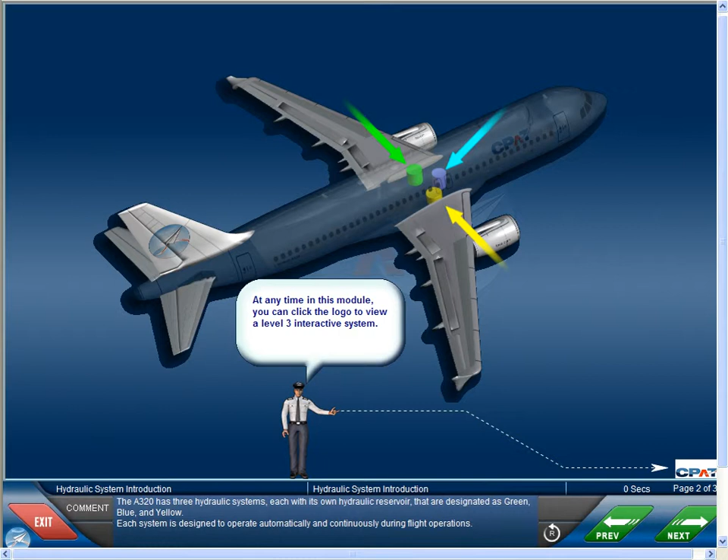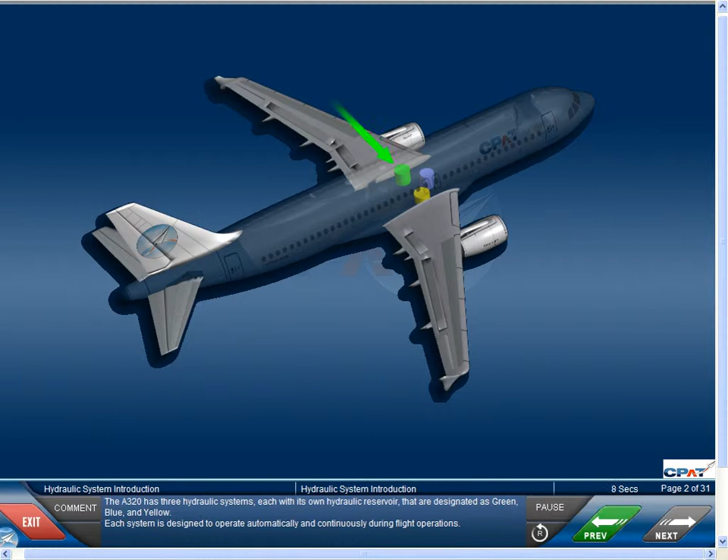The A320 has 3 hydraulic systems, each with its own hydraulic reservoir, designated as green, blue, and yellow. Each system is designed to operate automatically and continuously during flight operations.

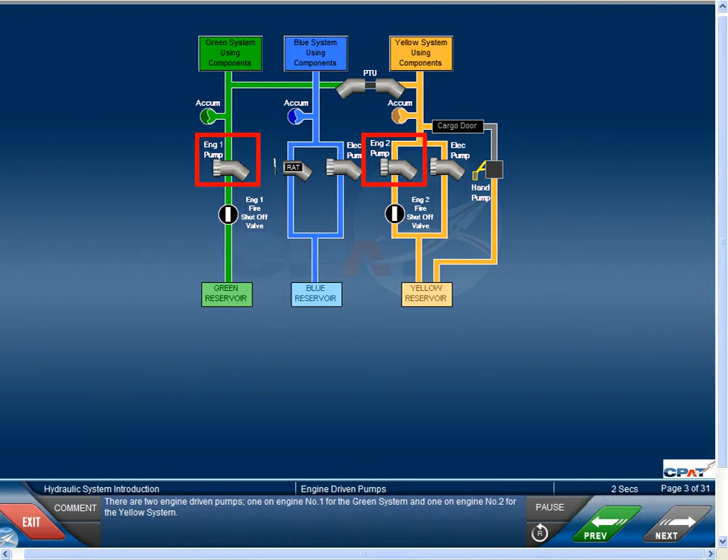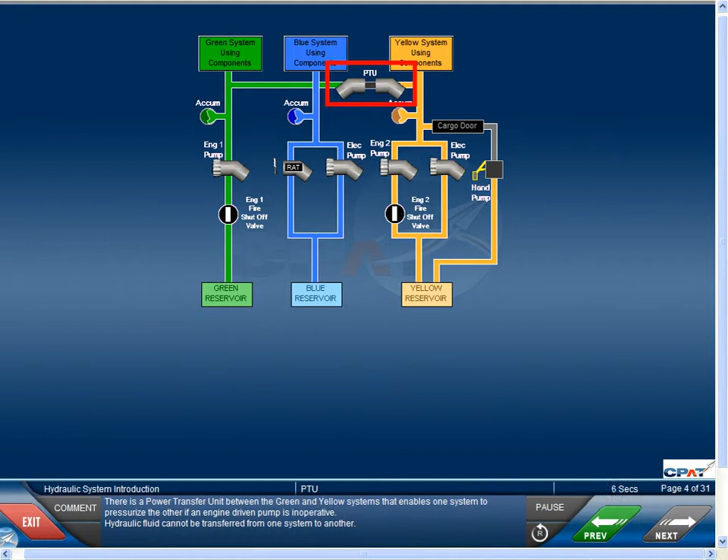There are 2 engine-driven pumps, one on engine number 1 for the green system and one on engine number 2 for the yellow system. There is a power transfer unit between the green and yellow systems that enables one system to pressurize the other if an engine-driven pump is inoperative. Hydraulic fluid cannot be transferred from one system to another.

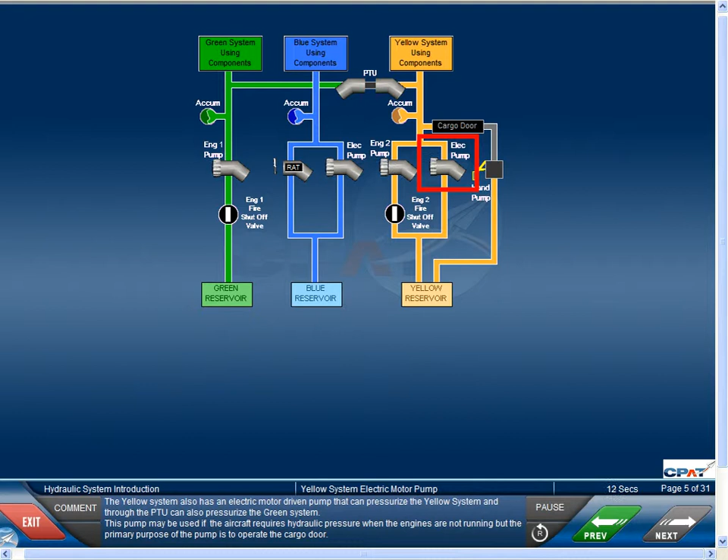The yellow system also has an electric motor-driven pump that can pressurize the yellow system and, through the PTU, can also pressurize the green system. This pump may be used if the aircraft requires hydraulic pressure when the engines are not running, but the primary purpose of the pump is to operate the cargo door.

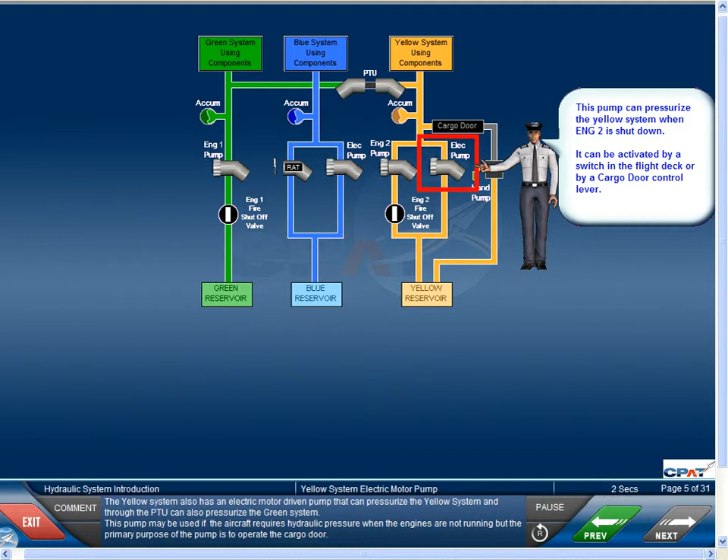The yellow system is also equipped with a hand pump that allows manual pressurization of that system to operate the cargo doors when the aircraft is not electrically powered.

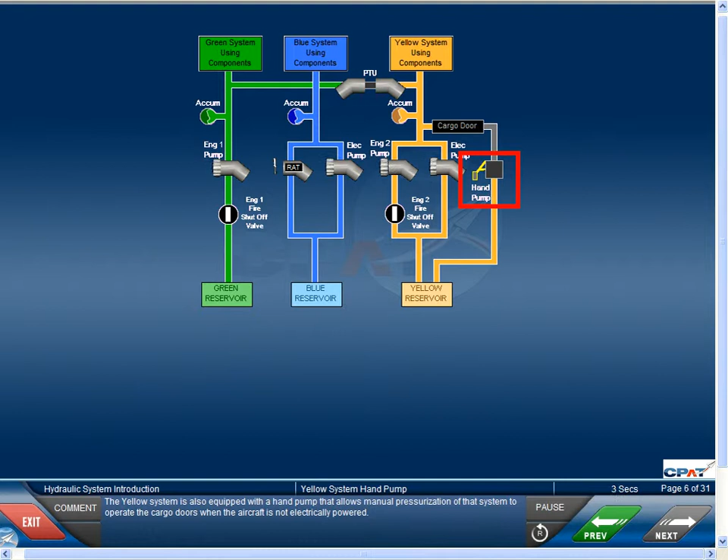The blue system is normally pressurized by an electric motor-driven pump, and during an emergency, the blue system can alternately be pressurized by the ram air turbine. Normal system operating pressure for all 3 systems is 3,000 psi. However, the RAT pressure to the blue system is approximately 2,500 psi.

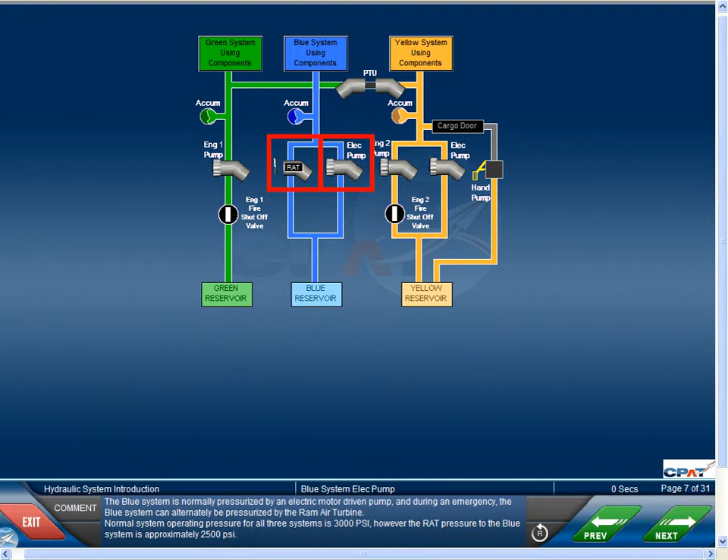The controls for the hydraulic system are on the overhead panel. Take a moment to identify each switch with the components on the diagram.

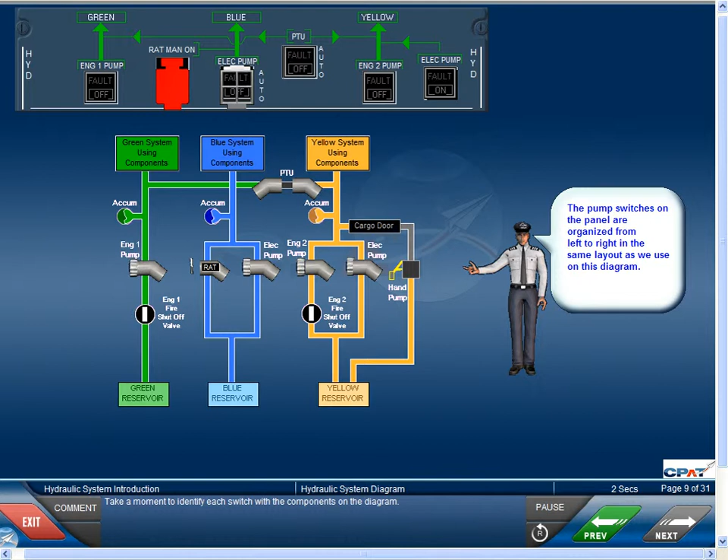Indications consist of memos on the engine and warning display and on the ECAM hydraulic page. Notice the ECAM page shows the main system components and the flow of hydraulic pressure. Now take a moment to associate the switches on the panel with the components on the ECAM page.

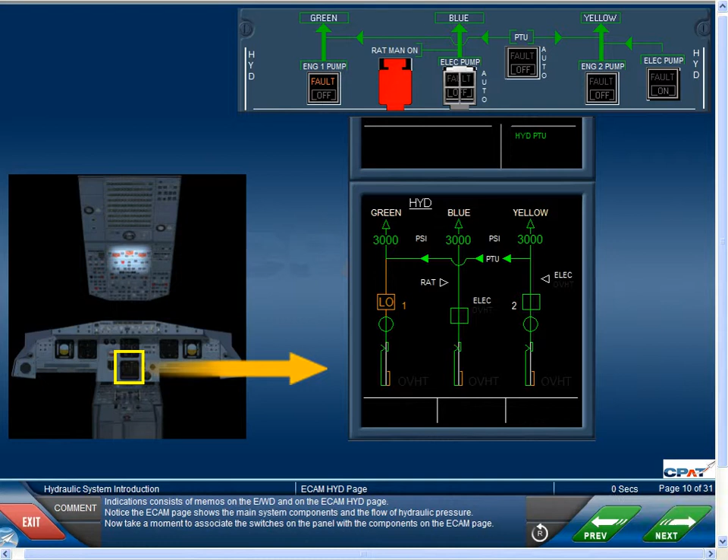Let's look closely at each system in more detail. The green system is normally pressurized by a pump driven by engine 1, and it normally operates whenever the engine is running.

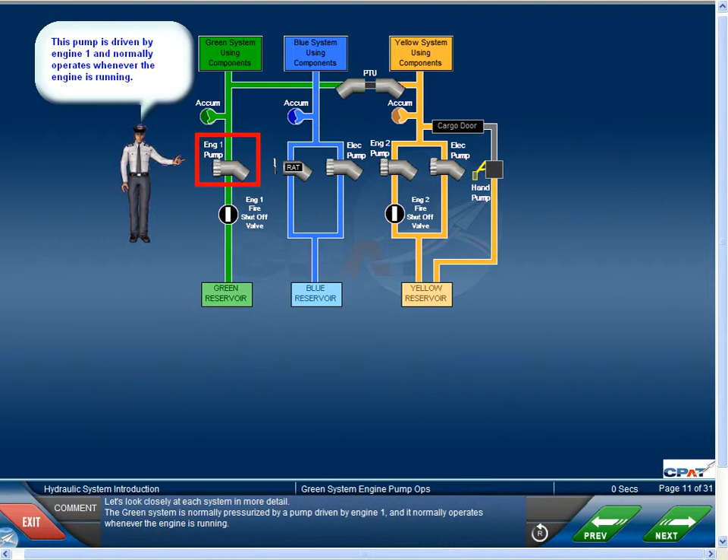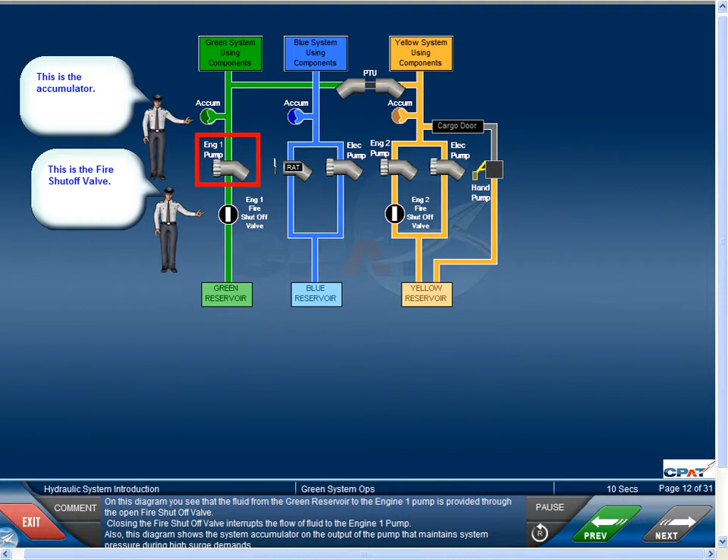On this diagram, you see that the fluid from the green reservoir to engine number 1 pump is provided through an open fire shutoff valve. Closing the fire shutoff valve interrupts the flow of fluid to the engine number 1 pump. Also, this diagram shows the system accumulator on the output of the pump that maintains system pressure during high surge demands.

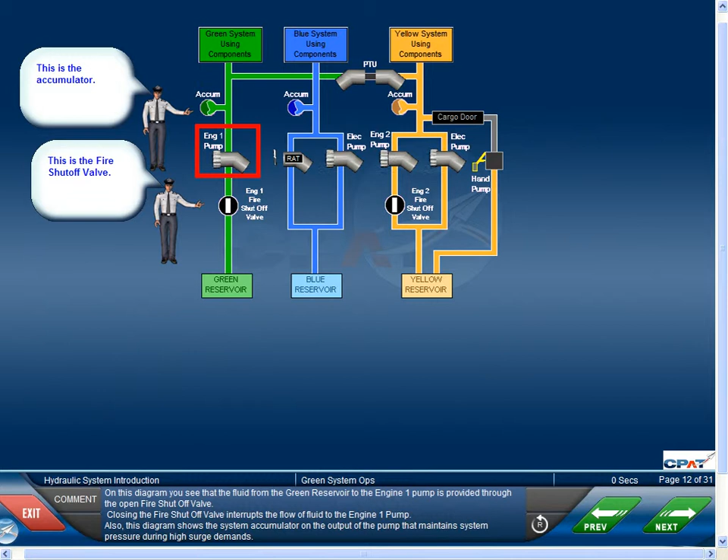The blue system is normally pressurized by an electric pump. However, in an emergency, a pump driven by a ram air turbine, or RAT, can pressurize this system.

The blue system electric pump is operated normally in an automatic mode. In auto, it operates continuously in flight, but on the ground, the electric pump operates if one engine is running and automatically shuts off if both engines are not running.

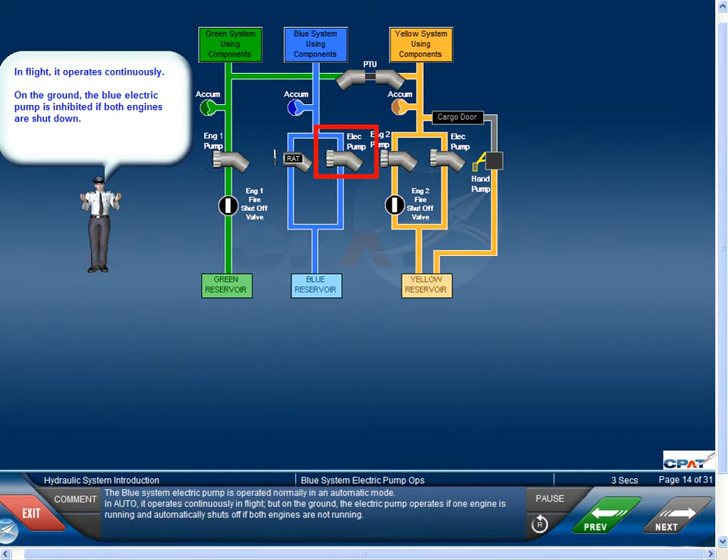When blue system pump operation on the ground is required, the crew can press the blue pump override push button on the hydraulic maintenance panel. This action overrides the automatic shutdown of this pump during ground operations.

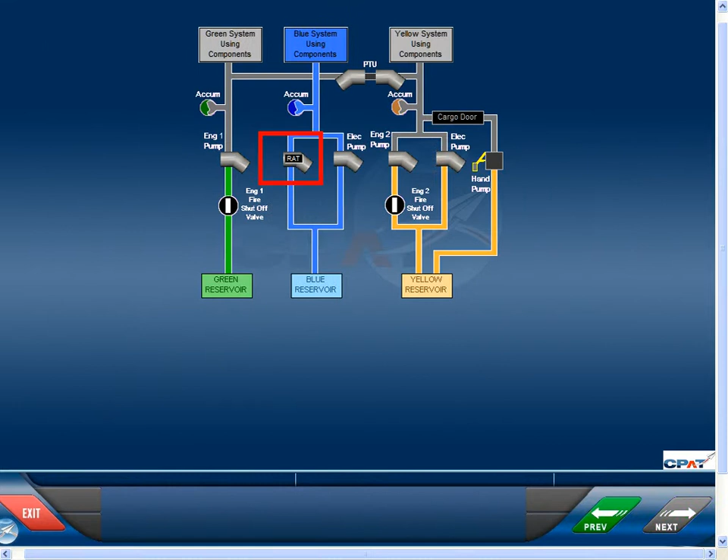The RAT will automatically drop out into the wind stream if electrical power is lost or both engines fail, or it can be deployed manually. Therefore, the RAT provides backup emergency pressure. This system also has a system accumulator to maintain system pressure during high surge demands.

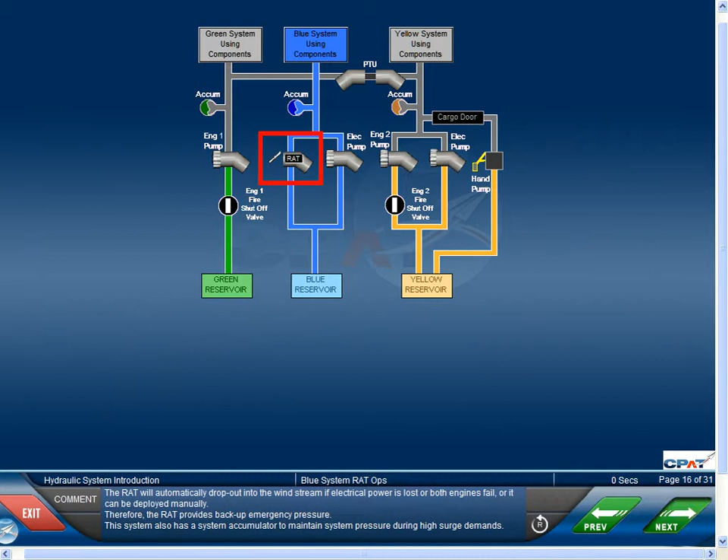The yellow system is normally pressurized by a pump driven by engine number 2, and it will normally operate whenever the engine is running. As with the green system, a fire shutoff valve controls the flow of fluid to this engine-driven pump.

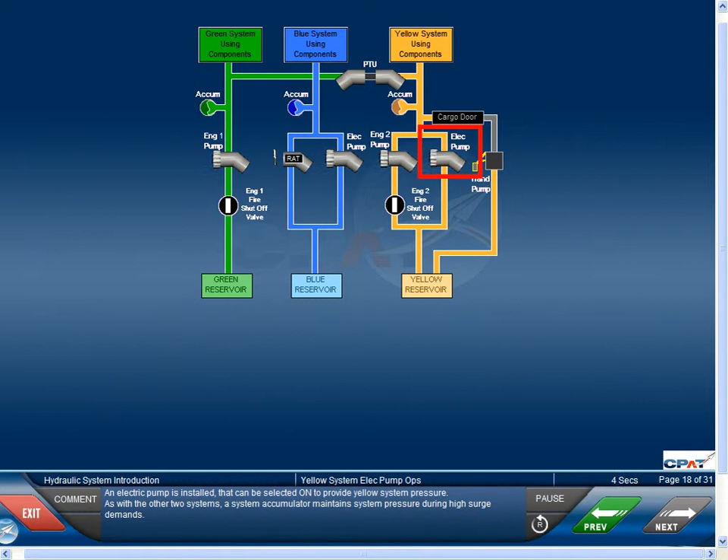An electric pump is installed that can be selected on to provide yellow system pressure. As with the other 2 systems, a system accumulator maintains system pressure during high surge demands.

The yellow system is also equipped with a hand pump to pressurize the yellow system. It is located in the yellow system ground service panel. This hand pump allows personnel to pressurize the yellow system for operation of the cargo doors when no electrical power is available.

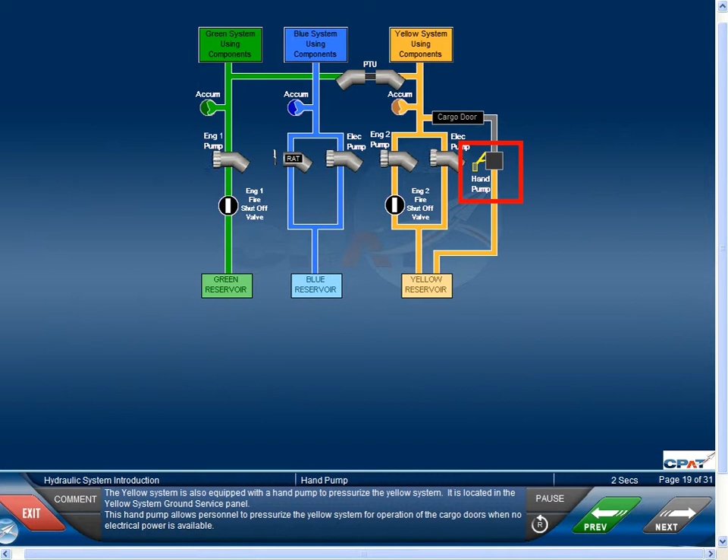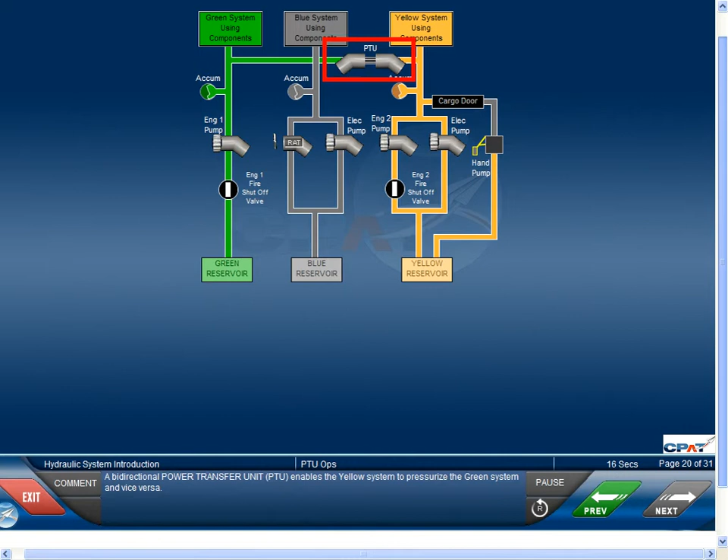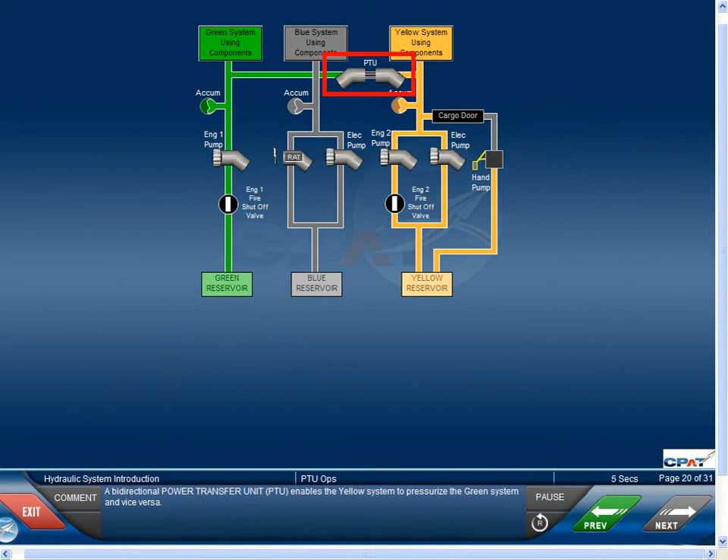A bidirectional power transfer unit, or PTU, enables the yellow system to pressurize the green system and vice versa. The PTU therefore allows the green system to be pressurized on the ground when the engines are off by use of yellow system pressure. The PTU activates automatically when the differential pressure between the green and yellow systems is greater than 500 psi. The PTU can maintain pressure to both systems, green or yellow, in the event of an engine failure or a failure of an engine-driven hydraulic pump.

This diagram shows how the reservoirs remain pressurized by either bleed air from engine number 1 or from a cross-bleed duct when engine number 1 bleed is not sufficient.

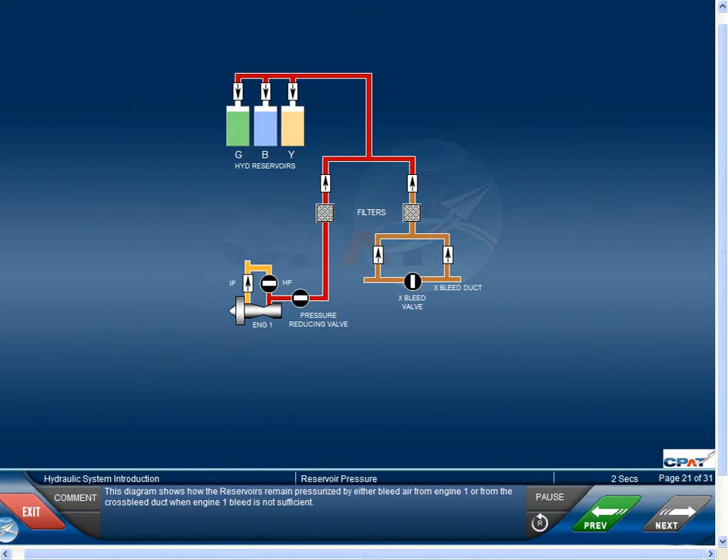A pressurized reservoir provides the motivation to keep positive fluid flow to the hydraulic pumps. Without pressure, the pumps may cavitate at higher altitudes. This diagram also shows how the system is filtered to maintain clean fluid. Filters are a maintenance function.

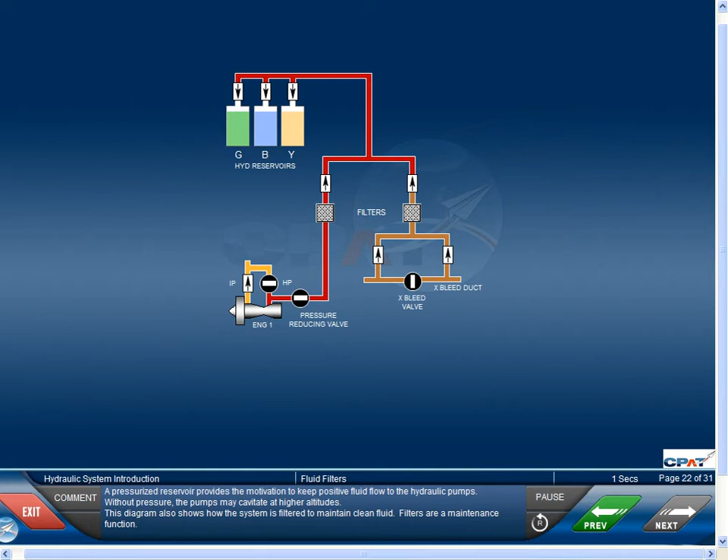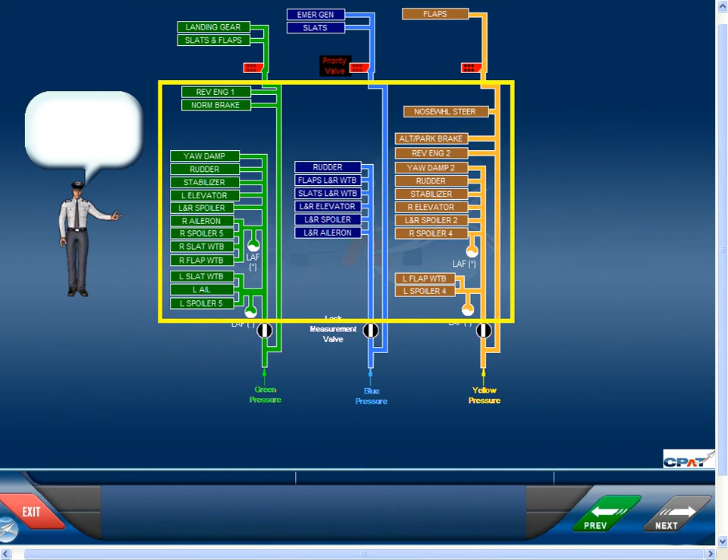A priority valve will close to cut off pressure to the heavy load users if the respective system pressure is low. This feature maintains pressure for the other higher priority components, such as primary flight controls and wingtip brakes for flight operations, and reversers and brakes for ground operations.

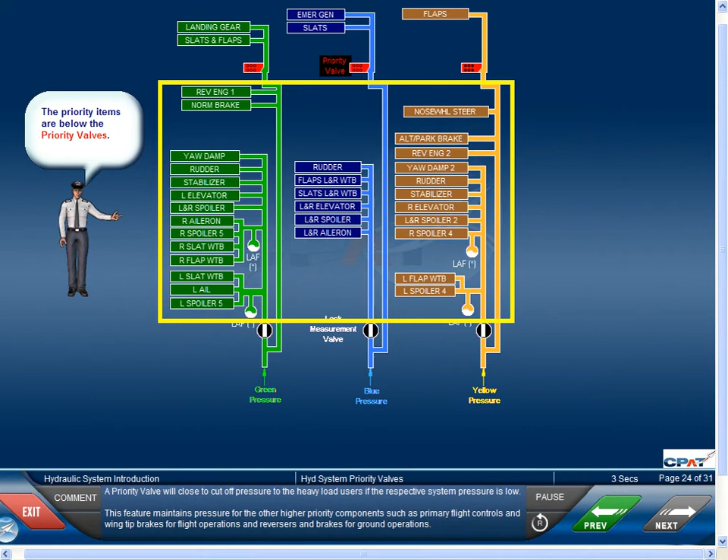Now on this frame, you should familiarize yourself with the source of pressure for the various components. Notice that many items are pressurized by 2 or more systems. Finally, notice that the emergency electrical generator is pressurized by the blue system, and it is a high load item on that system.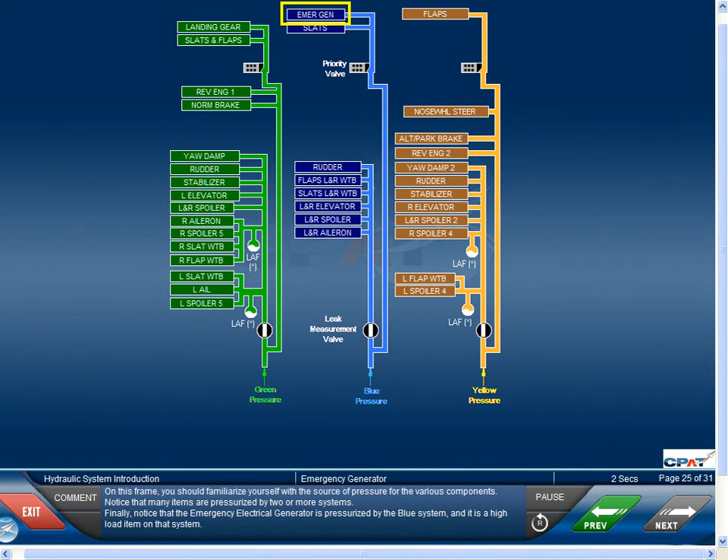Before we leave this diagram, we'll describe the leak measurement valves. Each leak measurement valve measures the leakage in each system. Each valve can be manually closed by operation of the leak measurement valve's push button on the maintenance panel. These push buttons are for ground maintenance use only.

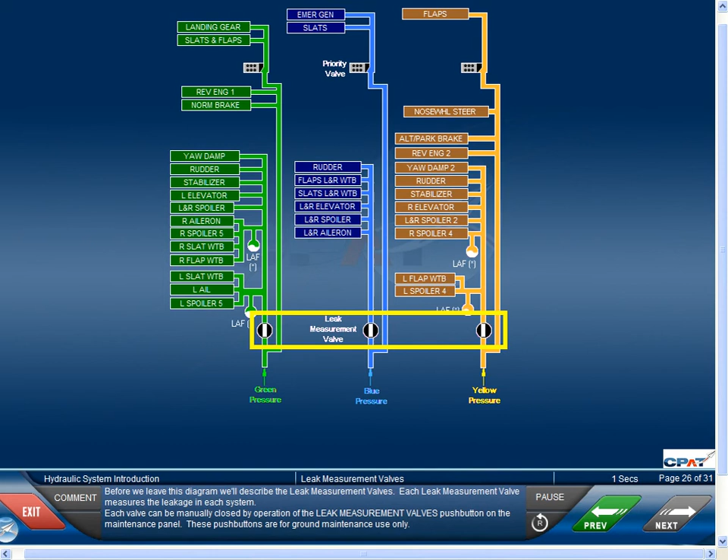That completes our introduction to the A320 hydraulic system. Let's answer some questions.